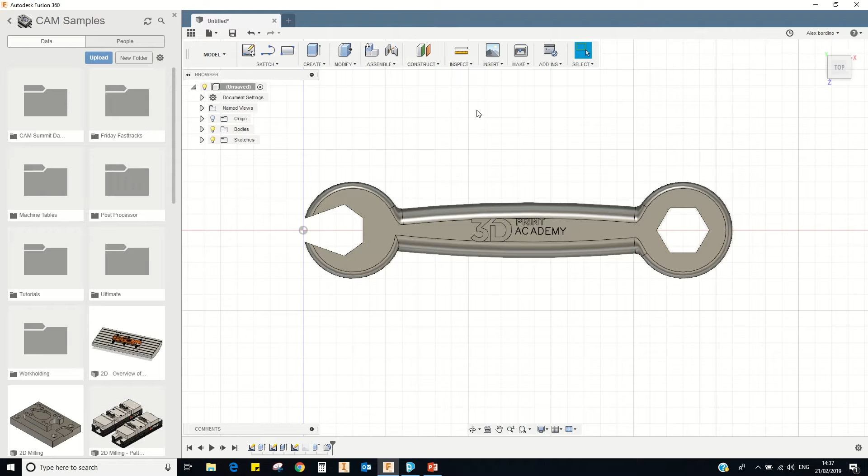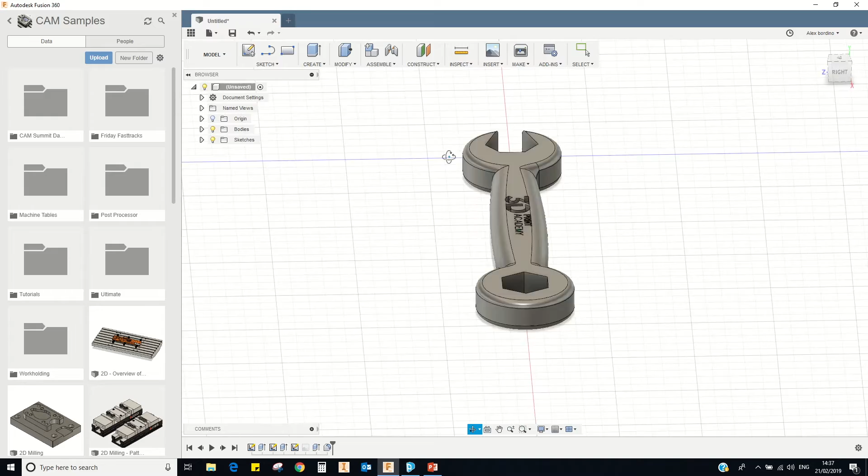This is Alex from 3D Print Academy, and in this tutorial I'm going to show you how you can use Fusion 360 to model this spanner, and then also how we can export it as an IGES or STL file so that it can be read by 3D printing preparation programs and actually 3D printed. But the first step is to actually model this in CAD, and we are going to use Fusion.

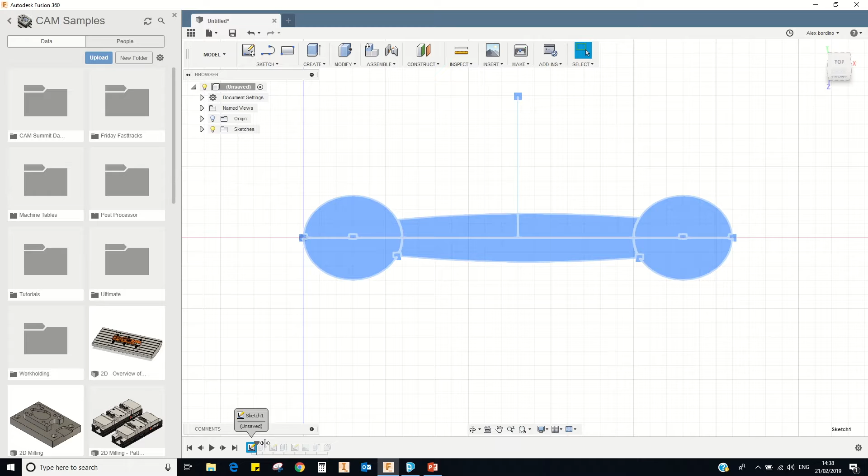I'm going to show you step by step how you can create this. So this is one I've made earlier, and the good thing with Fusion is I can go back in time and see all the steps that were used to actually build this. But before I do that, just some basic navigation if you haven't used Fusion before.

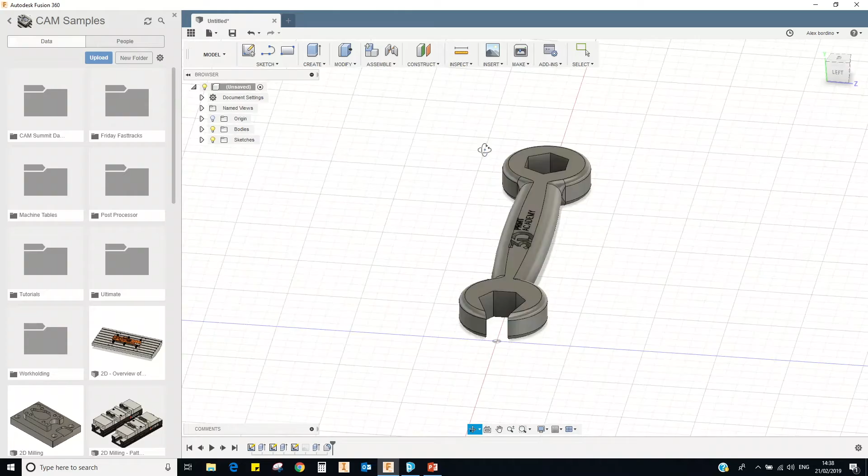To move around the model, if you zoom on the mouse wheel, you'll zoom in and out. You can hold the middle mouse wheel in to pan around. And if you hold shift and the middle mouse wheel and move your mouse, you will then be able to orbit round your model. So you can use all of these tools to navigate round and work on your model. There's no right or wrong way you have to be looking. You just want to be able to look at something properly so you can actually see what you're doing, really.

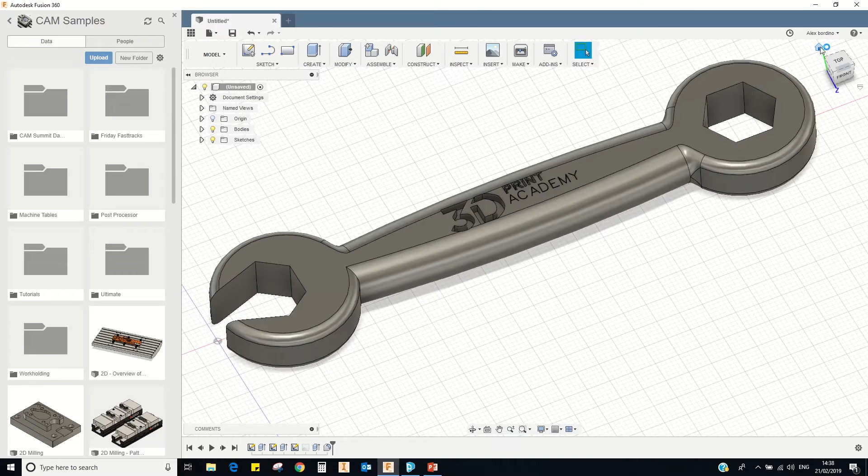As I'm moving around, you'll see that this little cube up here is moving about too. I can also use that by clicking on it to look at various areas of the model. I can click home just to return to the default view, and I can hit front, top, side, left, whatever. Really simple to use. So let's actually start building this from scratch.

So if I pull back on the timeline down here, you will see that I started off with this 2D sketch. So this is just mapping out the rough kind of design. And once that's kind of solid, we can then progress into the kind of 3D elements of it. So this 2D sketch is probably the most important part of the model. We need to make sure it's solid, that the CAD software knows exactly what sizes we're working with and how big things have got to be.

If it's unconstrained, that means if there's not enough information, basically, there's a risk that things could break later on. So we're going to make sure that that's not the case.

So when you first start Fusion, you've probably got a screen that looks a bit like this. First thing you're going to want to do is check that this says model. If it doesn't, click the drop down and click model, because we want to build a model.

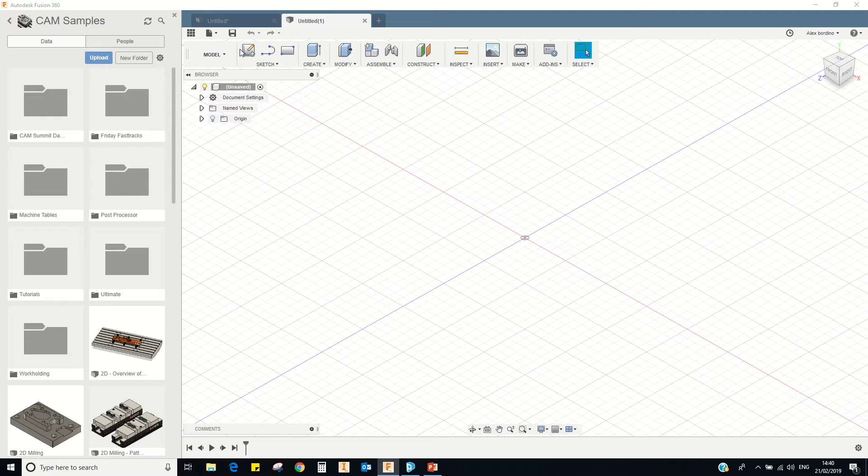And we want to create a sketch to start with. So we're going to hit create a sketch, and you're going to click on this little square here, this face or this plane, and we're going to navigate to there. So at the moment, this is the origin. That's the only point in time and space that the program knows where anything is. So we're going to draw off that, and basically we are going to replicate what's on this tab here.

So the first thing I'm going to put in is this overall dimension. There's 130 millimeters. This is going to be done with what's known as a construction line, just to roughly map out what it is we're building.

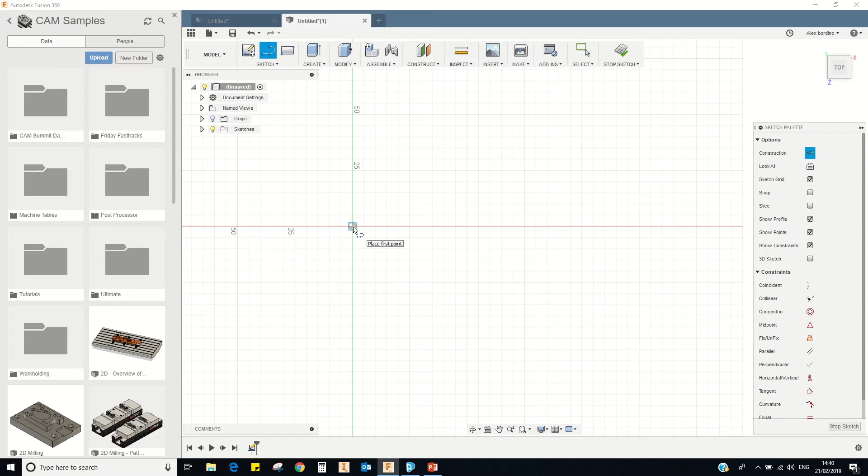So I've gone to the sketch area over here, clicked that drop down and clicked line. I'm then going over to this sketch palette window and selecting construction. So I can then click the origin here, and I'm starting to now draw a line, and you'll see that I can specify the distance and the angle. So I'm just going to snap it onto this red origin plane here.

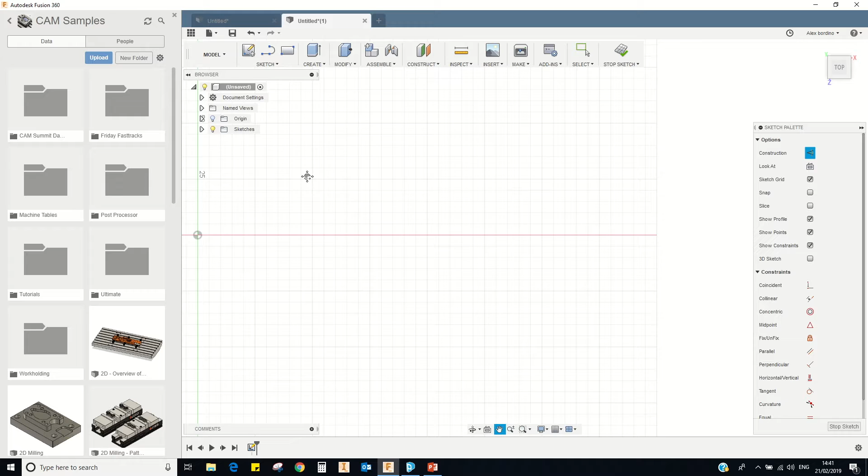I'm going to type the distance I want, 130 mil. Hit enter on the degrees because we want it at 0. And right click and press OK. Sorry, don't click OK, actually click on your mouse. My apologies. There we go.

So we've now got a construction line that's 130 millimeters, and that's going to be kind of the basis of our shape. So now we're going to do these circles.

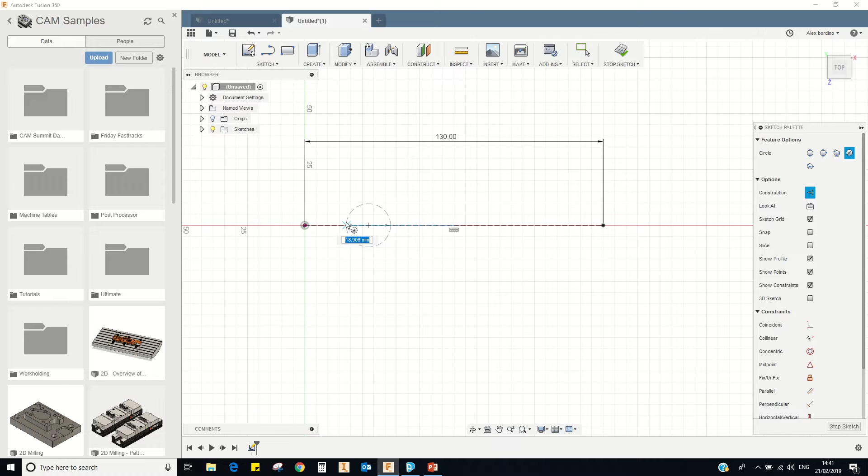So we're going to select the sketch button here, circle, and I'm going to go for a center diameter circle. Now my center of my circle is going to be on this line, so I'm just going to draw from any point on the line here and draw out until I meet the edge of this. So I've drawn that circle.

It's come out as a construction line. I don't want that. I want it to be a solid line so that we can actually extrude and create 3D geometry from this. So I'll pick that circle, deselect construction. Now what I've got to do is tell Fusion the exact size of this circle, because at the moment it's just any old size.

I've just told it I need this edge to be on this point here. But what I can now do is type D on my keyboard, and you'll see my cursor changes to a dimension tool. I can click the diameter of the circle, pull off a dimension, and type the value I want. So I'm going to type 30. That should now resize that circle so it's still centered on that line and hits the edge of this line here, so we're not going past 130, and it's 30 diameter.

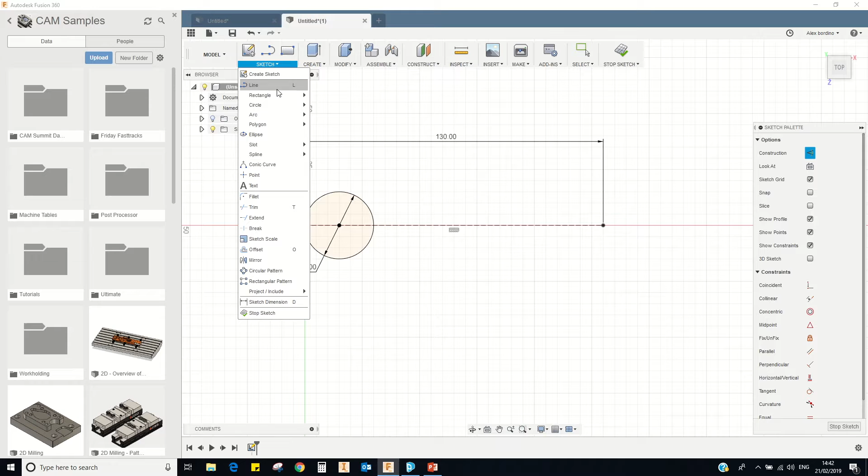So that's great, I'm happy with that. We're now going to do the same on the other side. So we'll go to circle, center diameter, just doing the same. And if I type D again, I can resize that to 30 mil. So that's the two circly bits of it done.

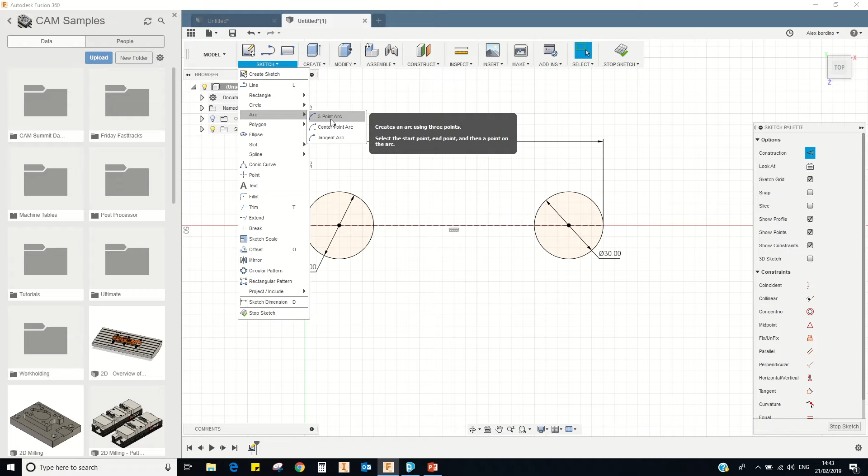We've now got this arced section here, which we'll now draw. So I'm going to go to sketch and arc. 3-point arc is what I want. Start of my arc will be somewhere here, end will be somewhere here, and I can then specify how I want my spanner to be. So we're going to do a bit of an arc up here, like that. And I'm going to convert that to a solid line again.

What I'm now going to do is tell Fusion exactly where to place this arc. As you can see, I can still drag it freely, which is not good. The circles I can't drag because they are fully constrained.

So we're going to type D and just dimension this arc up. First I'm going to click from this point to this point - that's going to be 73 something or other. Don't worry about the exact value, it just depends where you've placed your arc. That can be changed later.

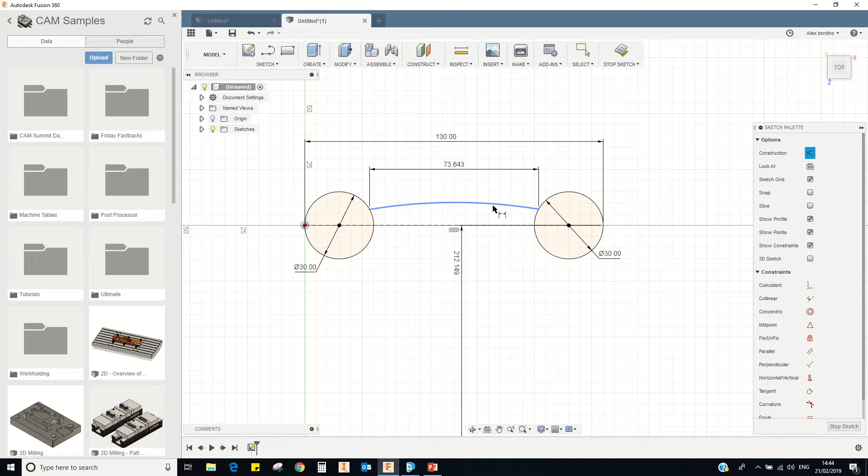We'll then put in the absolute radius of the arc. What else do we need? We will also need that radius as well. So we'll then pick this one here, and that should fully constrain your arc.

At this stage you can actually double click those dimensions and give them a more sensible number if you want to, although some of them it will probably prevent you from doing because they're restricted by other dimensions. So let's see if we can change that one. No, okay - the reason we can't change those is because these two points are absolute, and we've just told it to draw an arc between this point and this point, and it's fixed. So that's what it's going to be. Don't worry too much about the value of those numbers - it doesn't really matter for this application.

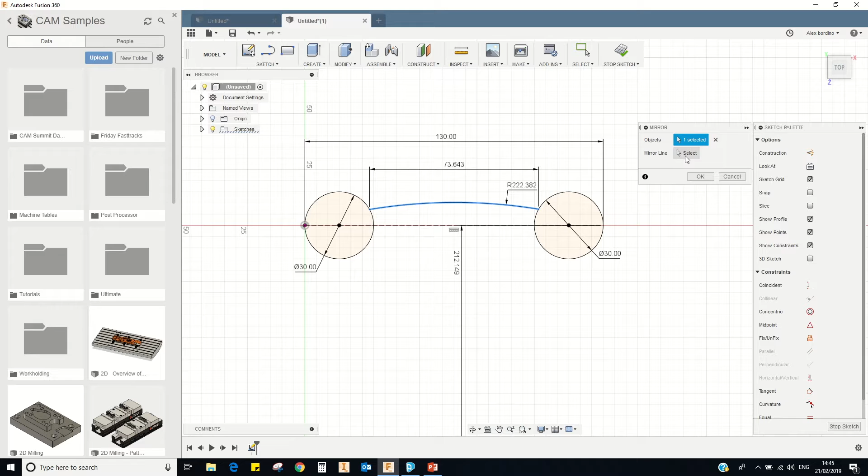So now that we've drawn one arc, we're not going to draw the other one - we're just going to copy it across. Providing you've got this construction line in the middle, we can use another command called mirror to actually mirror this line across. So we're going to go to sketch, mirror, pick this line, and then select the mirror line. We click that there, pick the mirror line, and press OK.

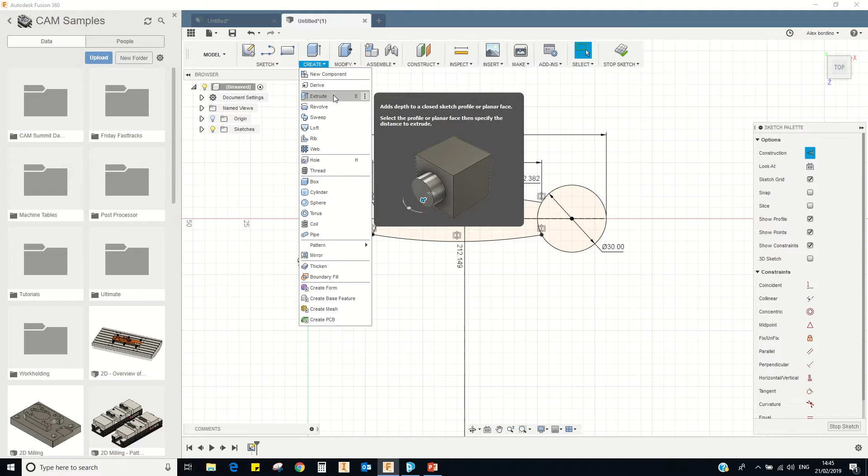So now we've started to actually build up, if I just orbit round, the overall shape of the spanner. If I just return to the top view, what we can now do is go on the Create tab and select Extrude - that will reorientate the view.

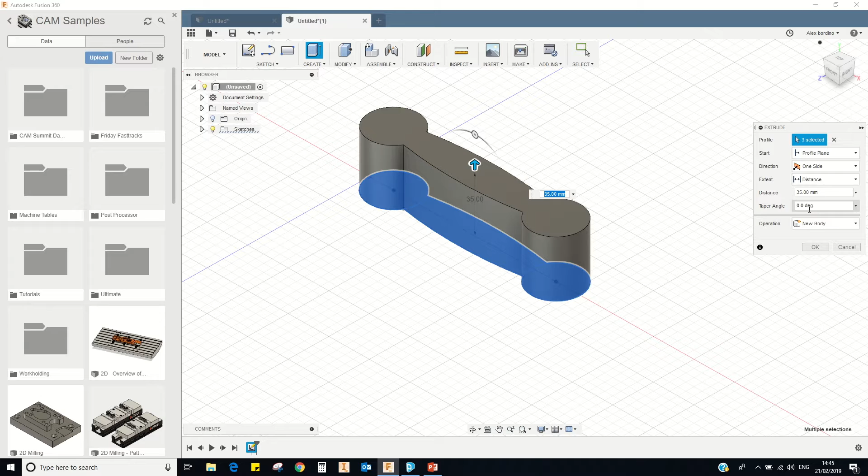What we can now do is pick these profiles to extrude them and actually make them 3D. So I'm going to pick the circle, this circle, and the midsection. I can drag this blue arrow up and extrude it to a certain value, or type that in here and change the direction. So I'm going to tell it that it's 10 mil in depth, so it's not too chunky - that's what we're going to go for, 10 mil. Hit OK - so we've now started to build up the shape.

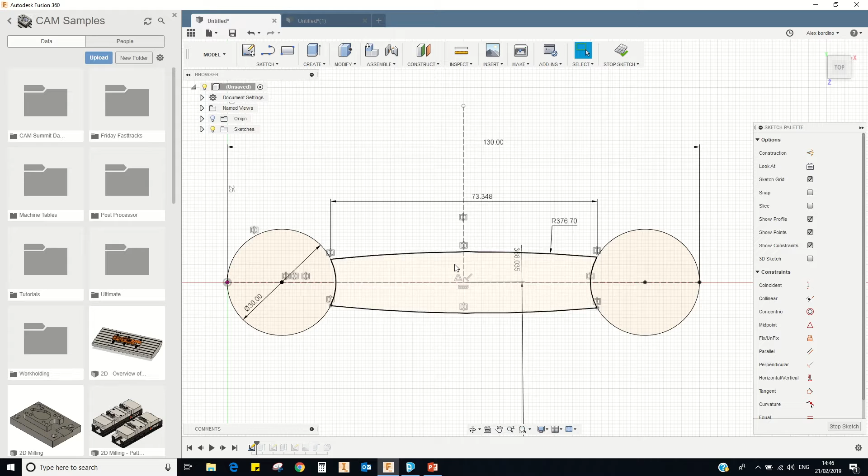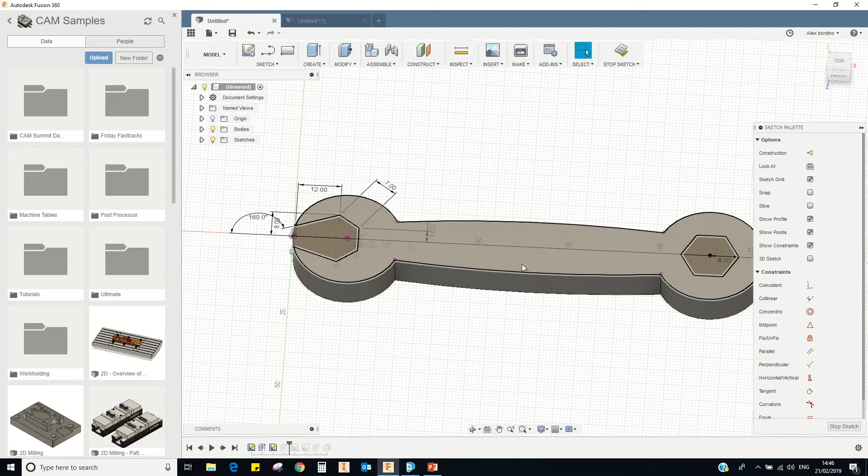So now what we've got to do is start to add some of the details onto this. If we go back to the original model, after the extrude we then created a secondary sketch with the details on, which were then cut out. So that's the next step - create these kind of features here, and it's quite easy to do. The first thing we're going to do is create another sketch on top of this 3D geometry we've just created, and we're going to create something similar to that.

So the first step is, if we go back to this model, we're going to click the top face we've just created, right click it, and a little menu appears. Click Create Sketch. That's going to create a sketch on this top face now.

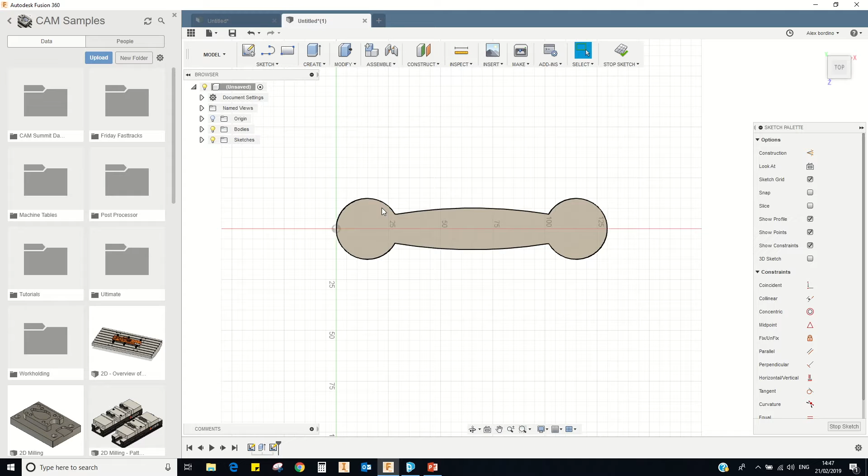So now we've got that, the next thing we need to do is something called Project Geometry. What that will do is automatically trace a sketch line of this shape for us. So we go to Sketch, then Project, hit that face there, and press OK.

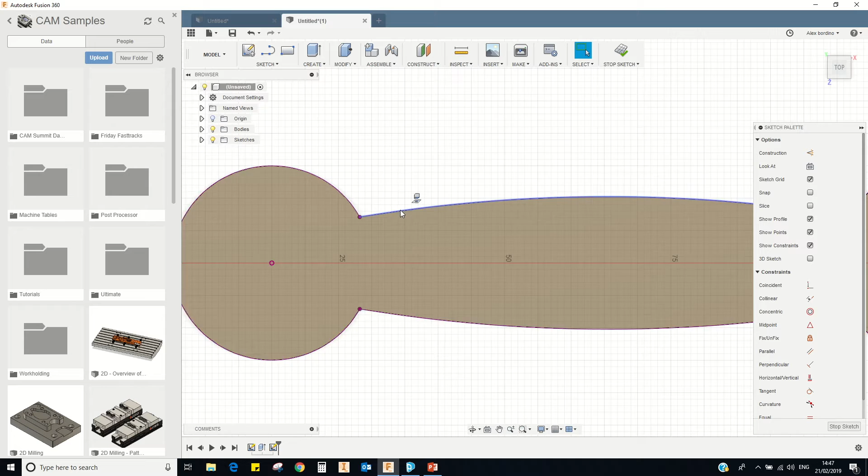What that will do is create some little purple points, and it will actually have created a purple kind of outline that's quite difficult to see around the shape. So we can now start building up the rest of the sketch.

Over on this side, I'm going to go to Sketch. We're going to hit Polygon, and we're going to hit Inscribed Polygon. What we're then going to do is hit this midpoint here, and we're going to draw out our polygon.

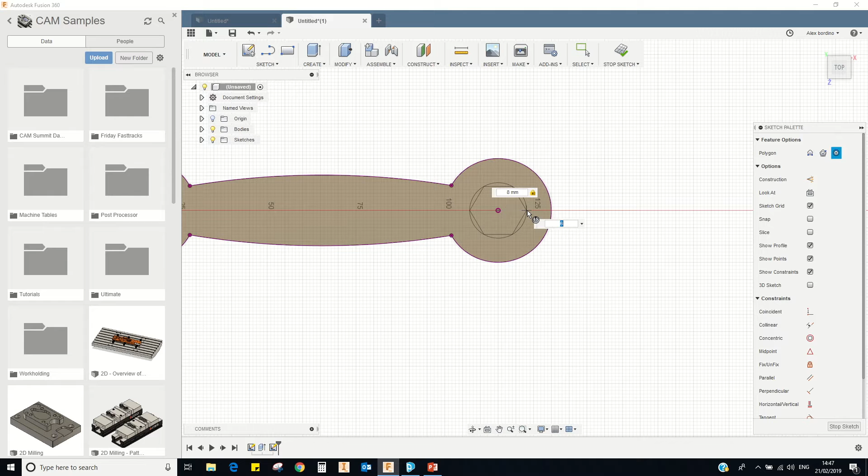I'm going to snap mine to the vertical here. You can give it a value of 8 millimeters, hit enter, and you can change the number of sides too. I'm going to go for 6, but you can type in an alternate number if you wish. Hit enter, and that's going to hit that there. I can then hit D and just constrain it to where it needs to be.

It's not that one. What it actually wants is probably a construction line. So I'm just going to draw another construction line from there to there. And if I just hit D, we'll tell it exactly where that is. So that's fully constrained by the looks of it. It's not moving anywhere, which is fine.

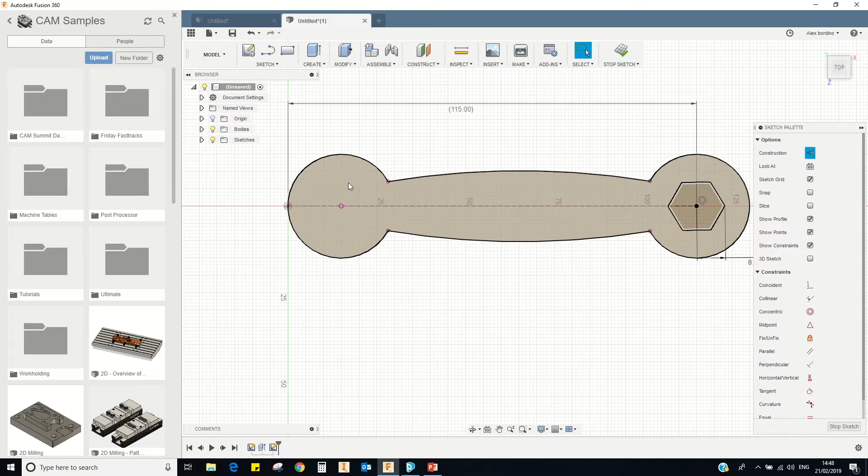So what we can now do is start drawing out the other part of the shape. Again, we're only going to draw half of it, and then we're going to mirror it. So I'm going to go to Sketch and Line, and start to draw out the shape. So line, there we go.

It doesn't matter too much on the value, you just want to get the rough kind of shape. Let me just go back. So it's going up, out, and flat down there. Okay, so let's go back. We'll go up vertically a little bit. We've got an angle, and then we'll come down. So we've got that roughly, and now we can play around with that and get it exactly how we want.

That'll do. Put some dimensions on there. So we'll have that there, make that 12, and we'll make that one 5. And we'll make the overall height of that 7, something like that. Yours may look a bit different to this, but it doesn't really matter, as long as you've got a rough kind of shape like that, that's key.

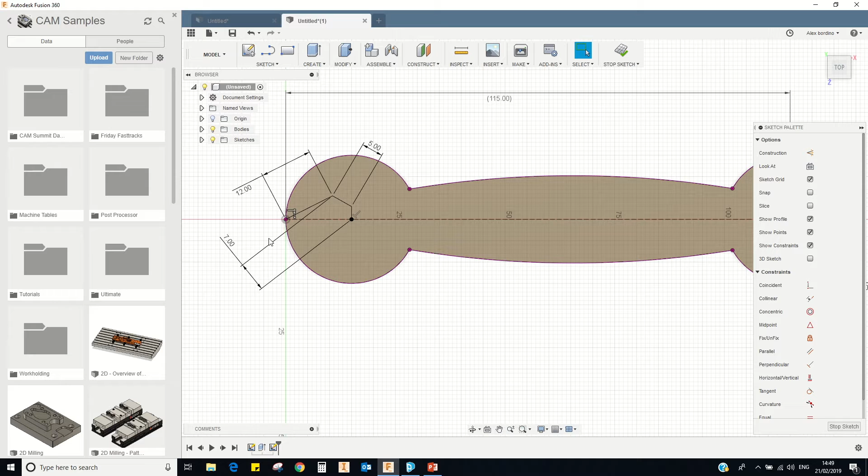I've just realised I've drawn mine a little bit wrong, because if I mirror it, it's not going to create a very good spanner shape. So I'm just going to redraw that line by pressing delete. I'm just going to redraw it to about here, so that we've got an actual gap. In fact, let's do that bit again. See, even the pros make mistakes. We'll go for 5 mil there, up, and we'll do it a bit more to there, to there.

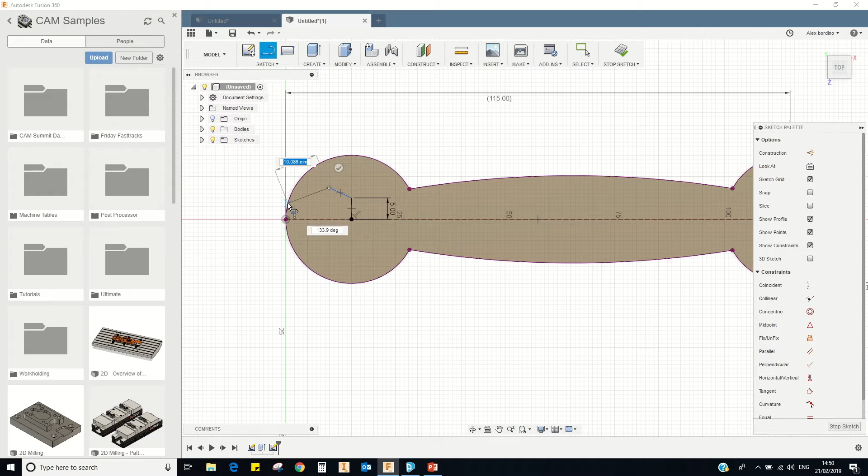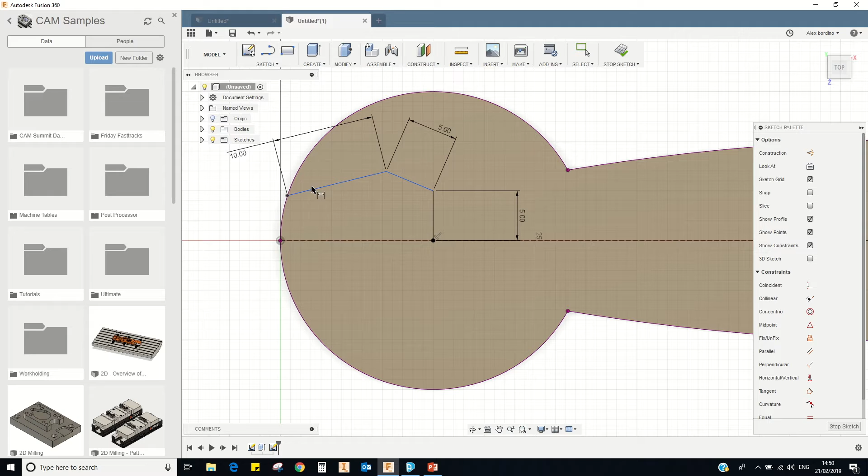So you don't want to end your sketch on this point here, otherwise it won't be a very usable spanner. So yeah, I've just redrawn it and changed the angle a bit. I'm going to add some other dimensions now by pressing D. We'll make that 12 — no, we won't, we'll make it 10 because that's what it was before. There we go, and we'll make that 5. That's fine, and then we'll just give that an overall distance there of 7. So that's great, now that's working.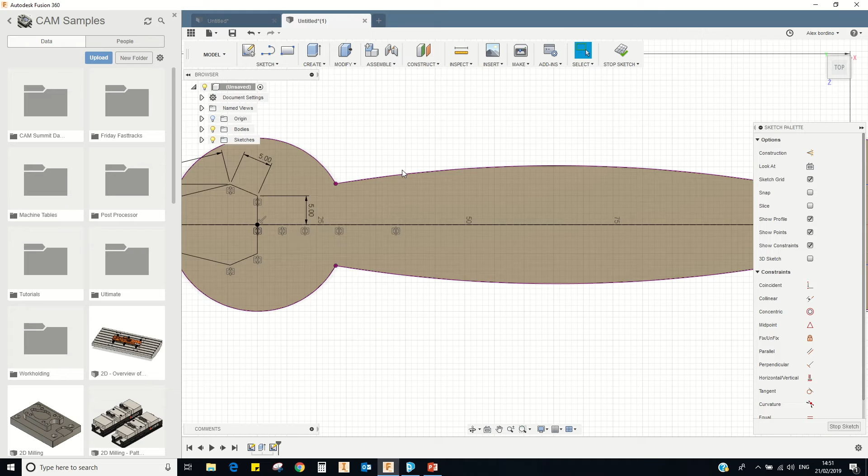What we can now do is mirror those lines across, so redrawing them. So we'll go Sketch and Mirror, and we'll pick those lines. That will be our mirror line. We'll press OK. So now we're starting to get a spanner-like shape.

What we can now do is hit Create and go Extrude again. This time we're going to pick those inner areas that we've just created. Drag your arrow down the other way and it should go red, and you'll see it's going to cut into the material now. So we can press OK, and that will cut that out. So we now actually do have a spanner.

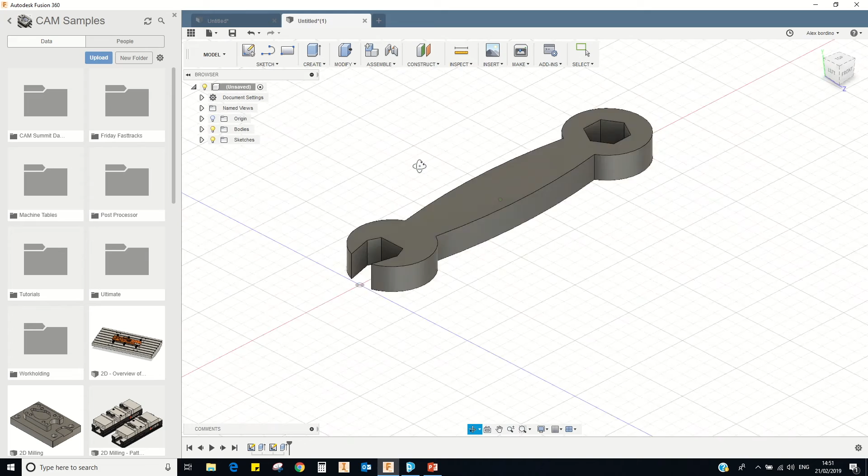It's nearly complete. The next bit is the trickiest bit, which is actually putting the text onto the model. So this is back to the original one now. If I just go back and forward in time, you can see that we've actually put the 3D Print Academy logo on. There are a number of ways you can do this, but the simplest is actually to bring it in as an image and draw around it.

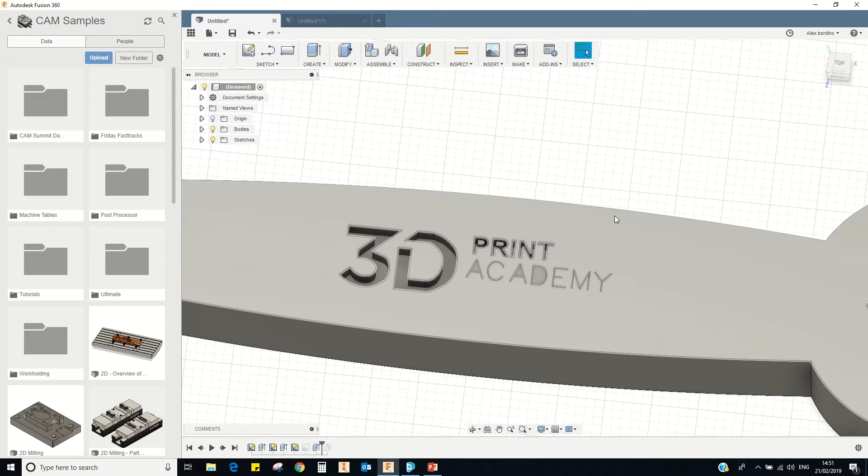So we're actually only going to draw around the 3D bit, so it's not difficult. The text elements of it, you could draw around, but it will take forever. So we're just going to use standard text tools and extrude downwards to create that.

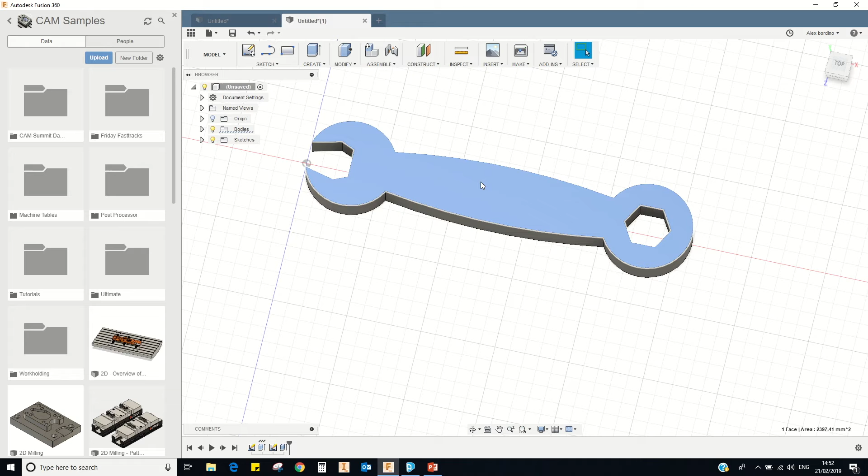So going back to our model here, again, we're going to click the top face, and we're going to right click it and go to Create Sketch. Now you'll need the image already saved onto your machine, which it should be.

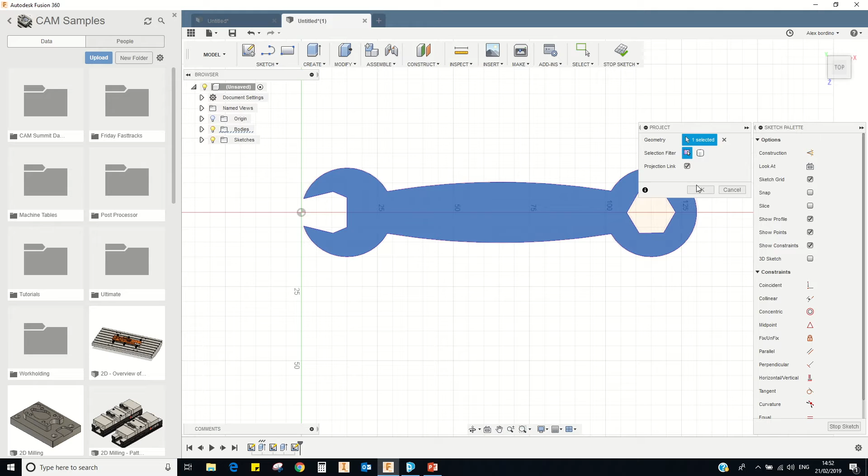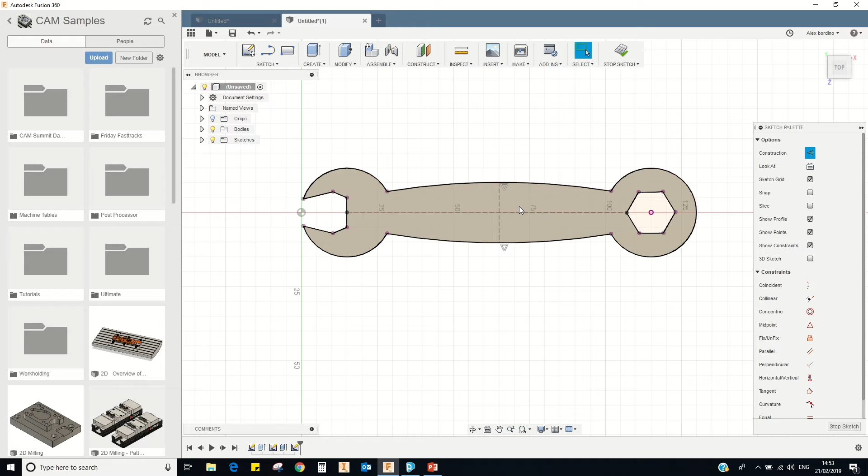Providing it is, you can then go to insert. But prior to doing that, what we'll do, we'll just project the geometry again. So we'll project that and we'll add a construction line just down the middle. And it might also be a good idea to add a secondary construction line from the middle down this way. You'll see as I move along the shape, a little triangle appears. That indicates that I'm at the middle or the midpoint. Now we've got a central location there to kind of line up our logo.

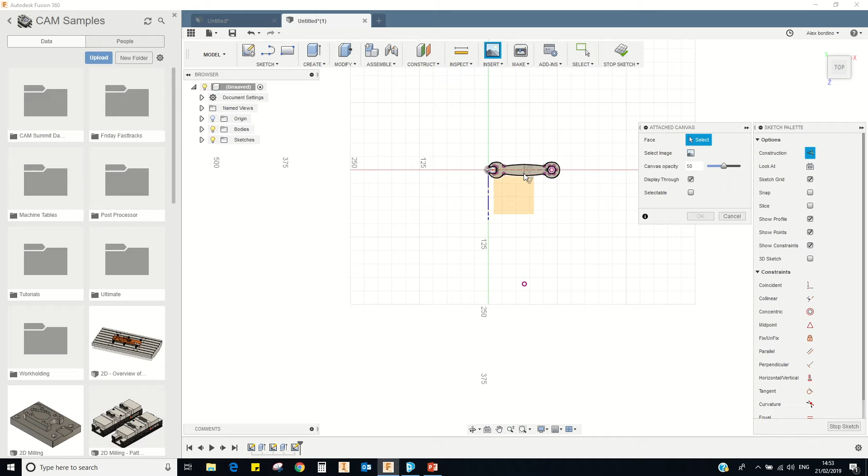So now we can go insert, and this little window will pop up. We can select the image. If you just navigate to wherever your image is saved, should be on your desktop, something like that. Click open, and that should, right, just click the face again, sorry. There you go. And now the image will be displayed.

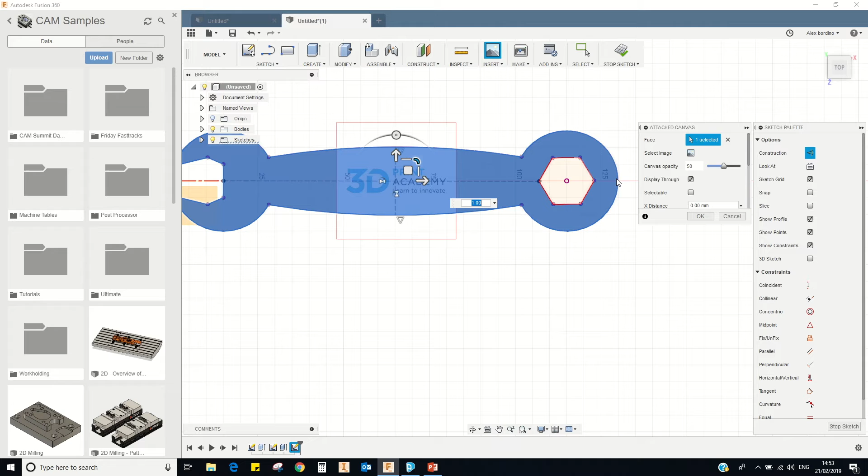So using this round area, we can rotate it round to where it needs to be. We can move it, and you can also increase the size of your logo. So don't make it too big. I left mine on 1, and it seems to fit nicely on the spanner, so we'll go with that. You can also change how opaque you want it. We actually want it quite visible because we're just going to be using it temporarily. So we'll whack that up to 100, press OK.

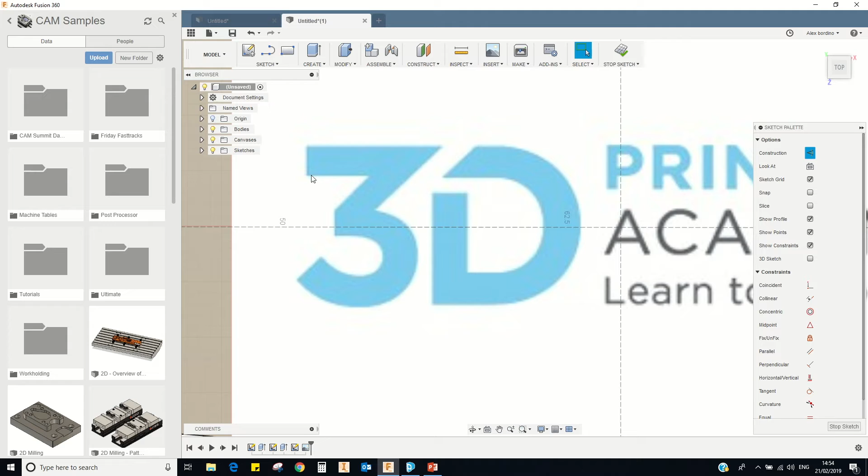So at the moment, that's just dumped the image onto that face. What we can now do is actually draw around it. So you're going to want to navigate to the top of the view cube and zoom in quite close, because the closer you are, the more accurate you are going to be able to trace round this shape. As I say, there are lots of other ways you can bring in images and create kind of decals or embossed features, but we're going to do it this way.

So for the straight lines, it's quite simple. I can just sketch along, make sure you've got solid lines selected. And don't worry about being too precise. As long as it's roughly there, it will look absolutely fine on the final model. So I'm just drawing around the text. So I'm not doing the curved bits yet. I'm just doing the straight bits with the straight line tool, like so. Try and do it letter by letter. Try not to do all of it in one go.

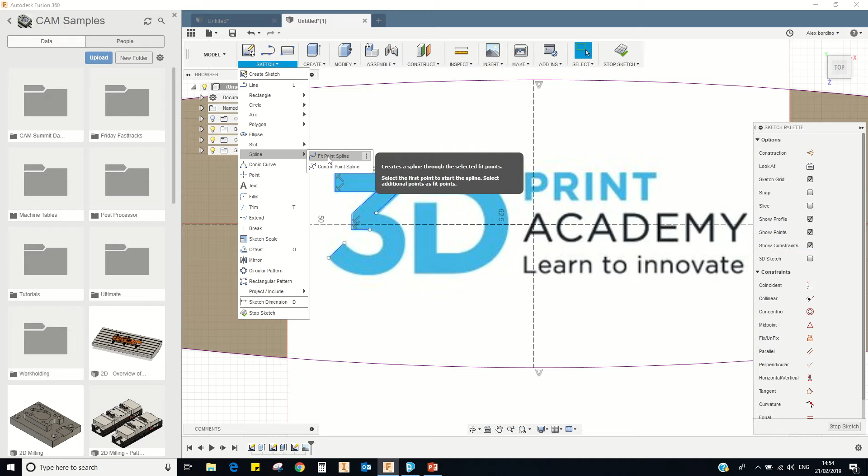For the curved bits, we're going to select a spline, which is here. And we're going to go to fit point spline. Basically, we're just going to keep clicking along the curve. And the more you click, the more accurate you'll be able to follow that curve. When we reach the end, just right click, press OK. And then we can go again. We can select spline and oops.

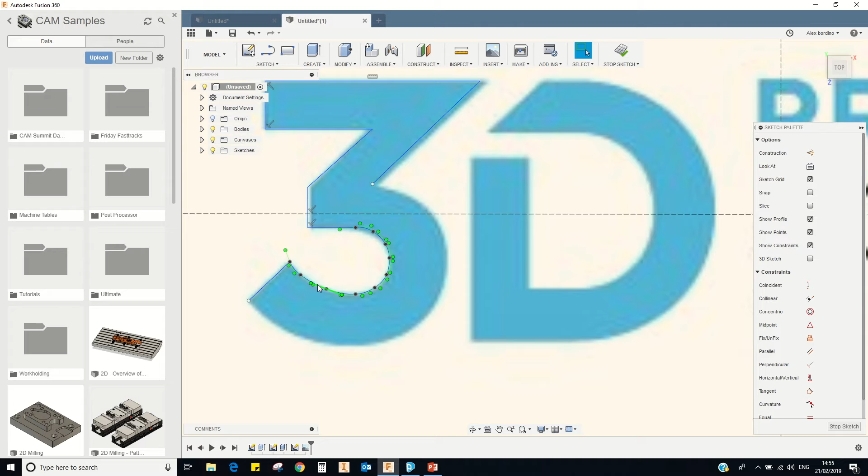Spline. Right. Why is that doing that? Spline. Have I got something selected I shouldn't have? I think I've come out the sketch now. There we go. So now I should be able to carry on drawing along.

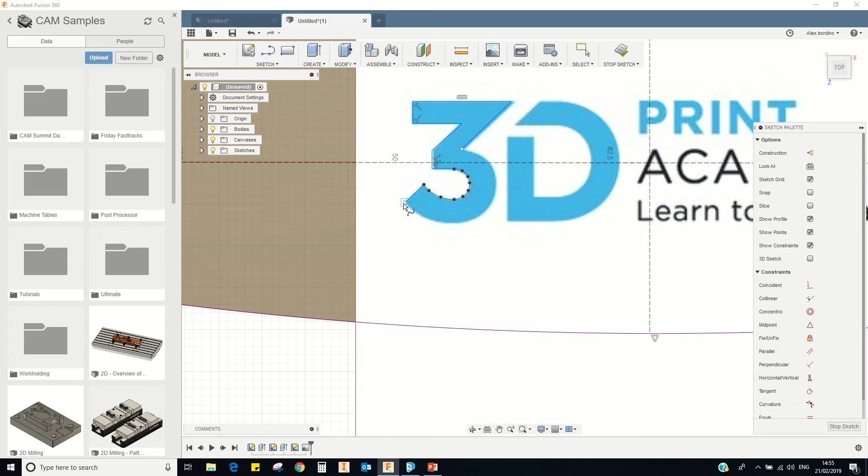Just roughly drawing around. It doesn't matter if you accidentally misclick, because the whole point of a spline is that you'll see once you create it, you get these control points which you can use to actually change the curvature of your shape. So once we've done one letter, we'll move on to this one.

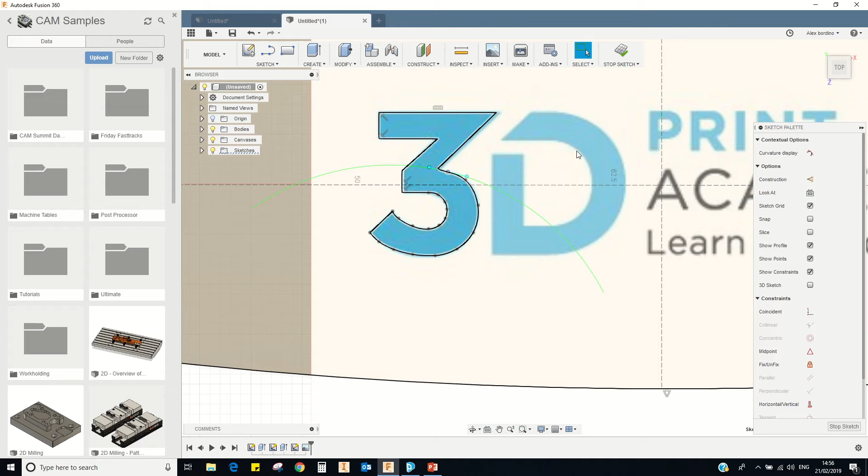Don't worry, we're not doing all of those. We're going to do those quicker. It's just this 3D bit we're going to do quickly. So then we'll do all the straight bits again. I should note as well, if you press L, you can get the line tool back quickly after you press escape. So for the curved bit again, we'll go to spline.

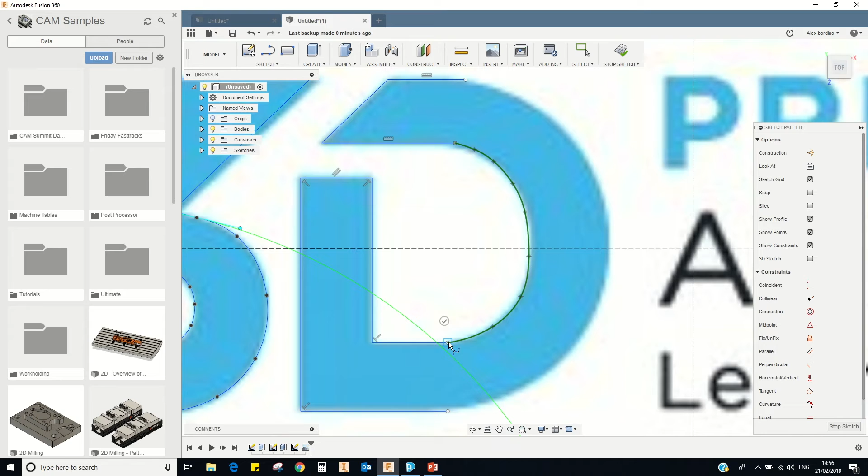I'll just zoom in a bit and roughly just trace around that curve. Okay, do another one. Oops, freezing a bit there. Right, spline, fit point, another.

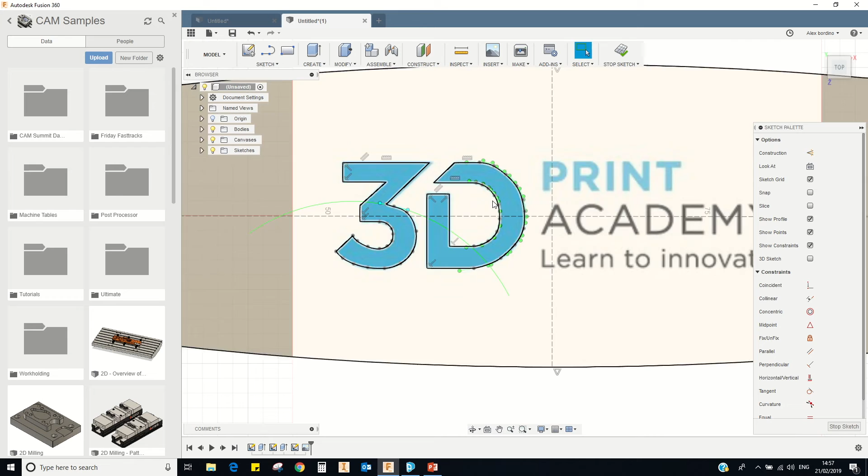Okay, so that's our 3D bit done. Again, you can modify and perfect it if you want to, just by pulling on those points. If you go wrong, just Control Z will undo.

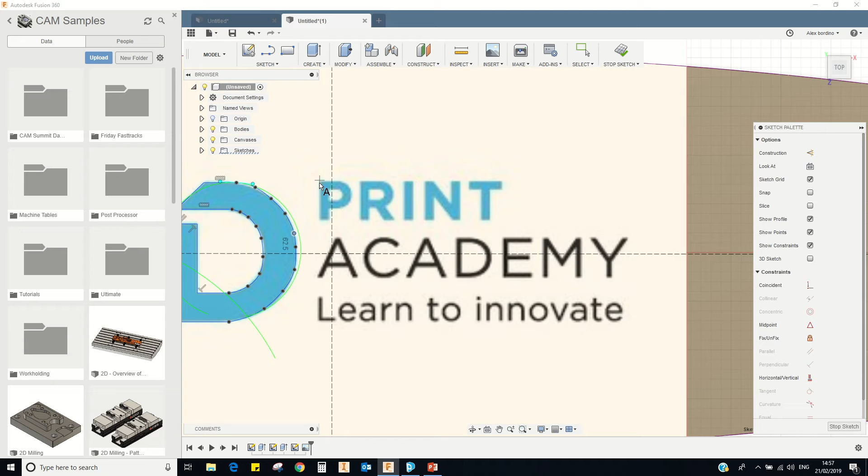So now we're going to do the text elements, and rather than draw this out, because this is just plain text, we're going to use a sketch text button. So we'll go to sketch and text, click somewhere on that P, and type PRINT in capitals. Hit bold, and that will start to generate the text. We can move it around, rotate it using the little thing that pops up, and we want it straight. If you type this, you can change the height.

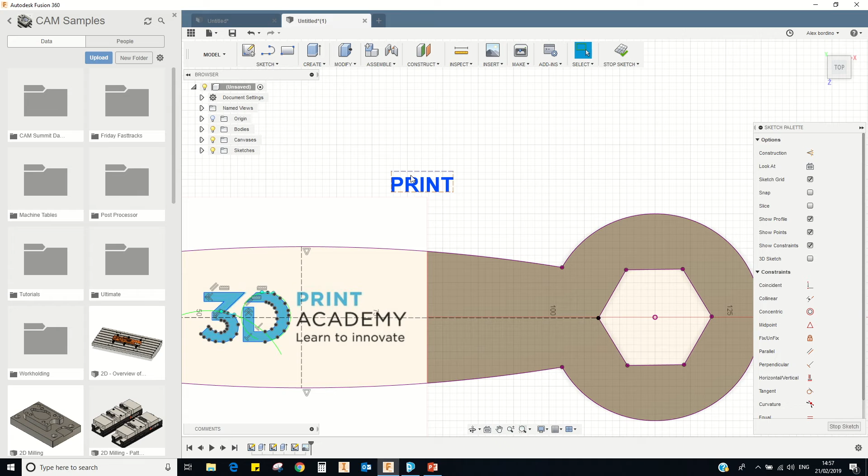So we might make that 5, maybe a bit smaller, 3. Yeah, that's going to do. So we'll click OK on that, and drag it to roughly over where PRINT is, so it's roughly matching.

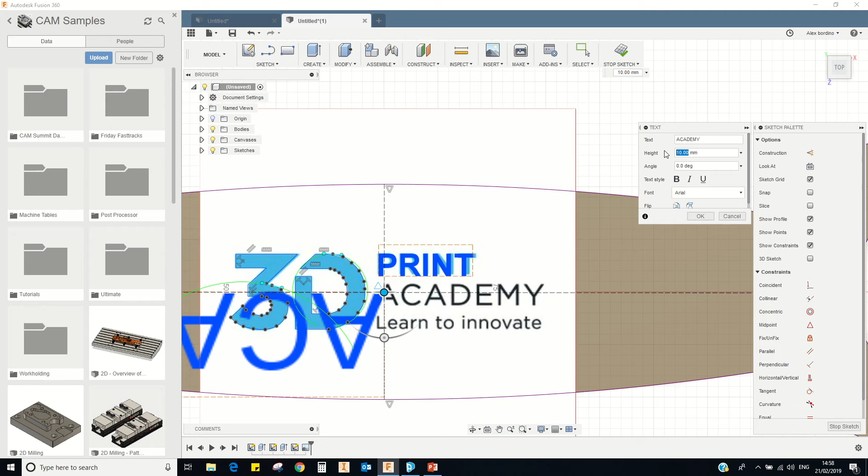Then we're going to do exactly the same for Academy. We'll take text, hit that point there, write Academy, change the height maybe to 2, and change the font to... not that one... AMGDT-IV25. As soon as you open that, you'll see it there. Just to thin it out, we'll reorientate it, and make it a little bit bigger. Let's make it 3, and let's make it bold.

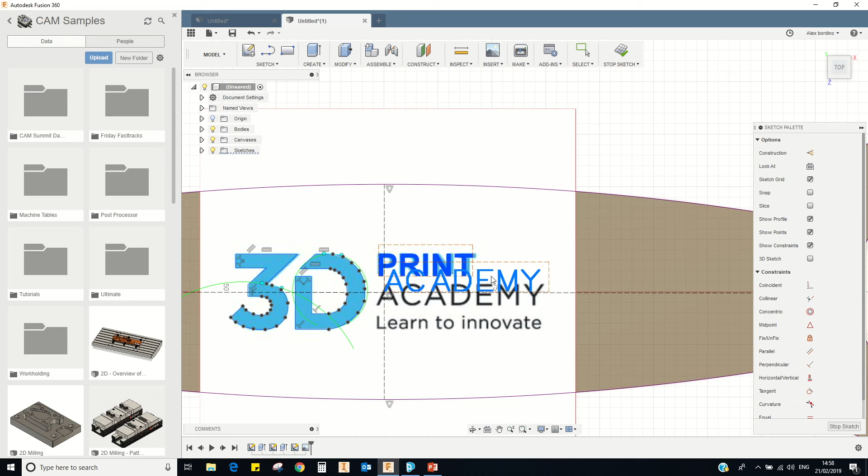Okay, so we'll just move that. Right, okay, I've accidentally hit the little construction point here, so my text wants to automatically fix to that point. If you want to move it off that point, you're actually going to have to delete it and redo it, so that's my bad. So don't just click the point, maybe just click somewhere in space, you won't have that problem.

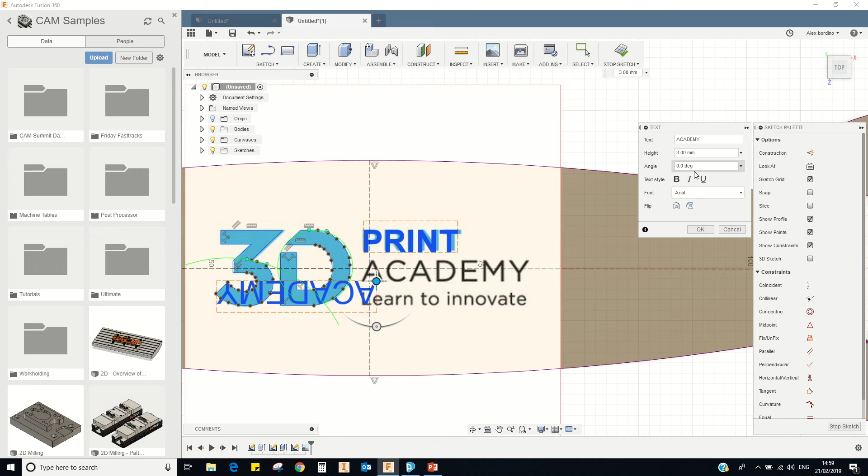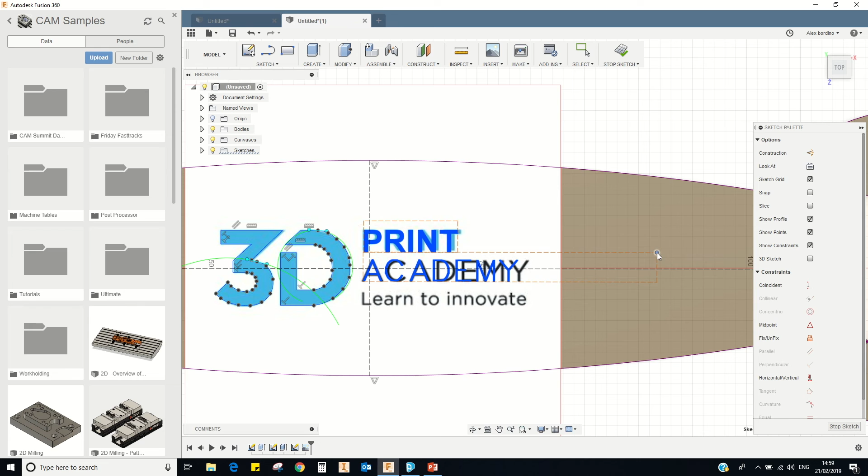So for Academy, we'll go for 3 mil, and we'll change the font to that one. We'll reorientate it, make it bold, hit OK, and then we can freely move it around, which is good. So we'll hit it there, size it up a bit. Again, because I don't have the exact font from Fusion loaded, it won't match exactly, but that's not a problem.

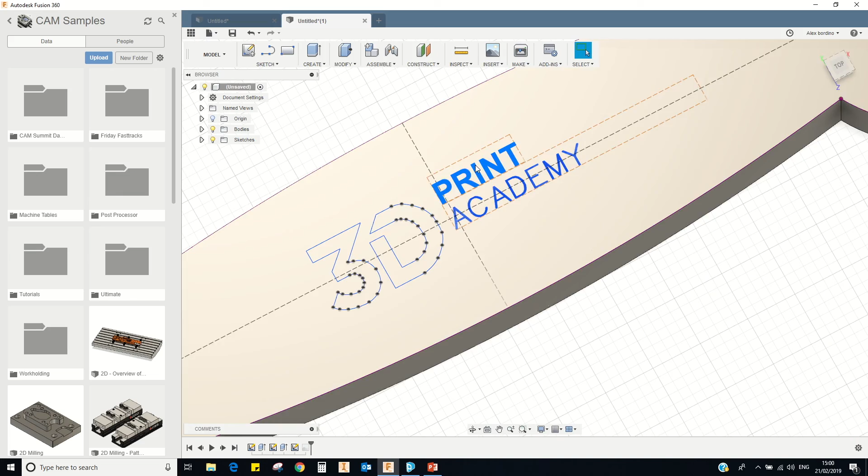So now what we can do is right click down here on that little picture - in fact we can stop the sketch first, right click on that image, and we can suppress feature, and that will just hide the image for us. So now what we've got is some areas that we can actually extrude and manipulate.

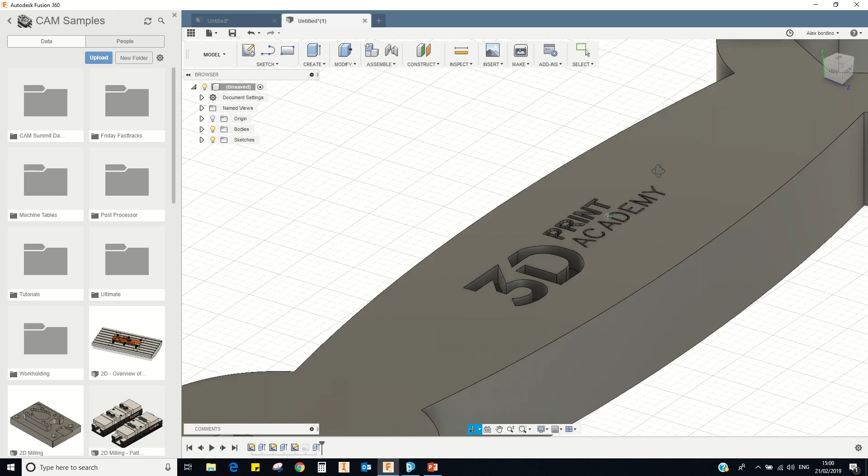So providing we're out of the sketch, we can now go to create, extrude, pick the 3D, pick both of your text, and just go down and type -2 mil and enter, and that will cut the text into your model. So the only thing we've got left to do now is round it off and make it a little more usable, a little more ergonomic.

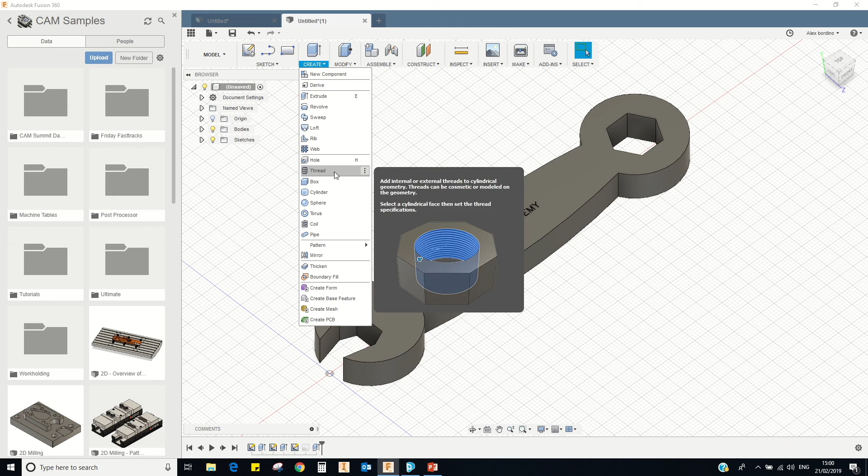If we go back to the original model, you'll see that's just been done by applying some fillets. So what we will now do is go back here, go to create, modify, and fillet. What we'll now do is pick the 4 edges here.

Okay, we'll give them a value that we want to have. I think 5 mil will work quite nicely. So 5 mil is going to create something like that.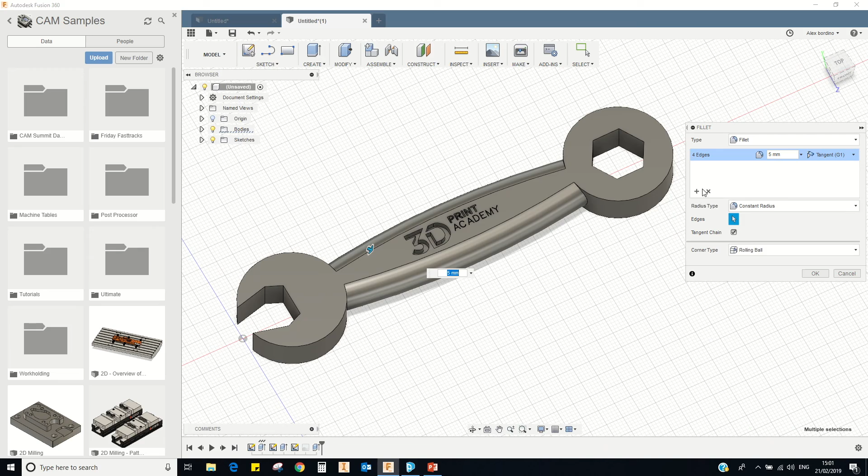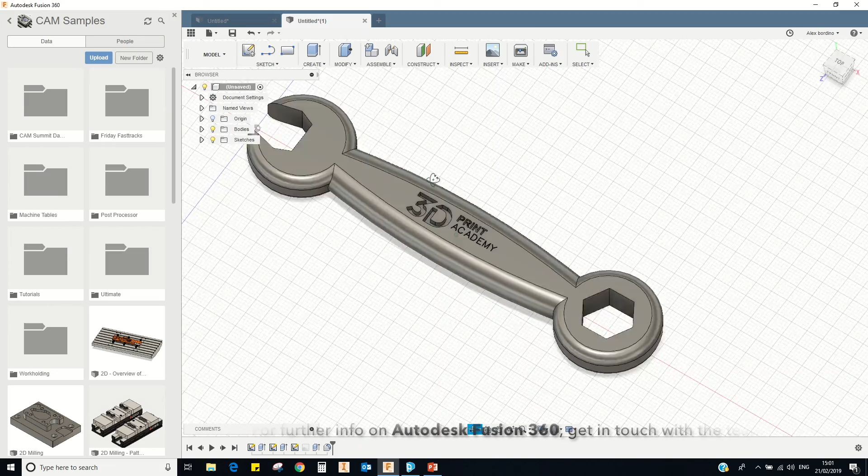So what we'll then do is click add new selection here, and we'll then pick this circle here, this circle here, that arc, that arc, that arc, and that arc, and we will type in 3 mil radius for those. And there we go. We'll now hit OK, and we have now built the spanner ready for 3D printing.

So what we now have to do is export this into a format that other 3D print programs can use. So we'll go to the little file button up here, and we will go to export. So for export, just call it 3D

PA spanner, and then just put your name there.

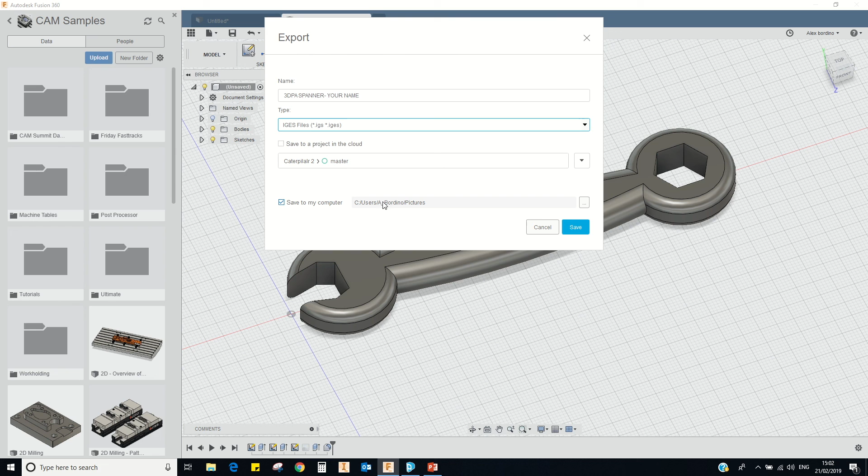The file type, you're going to want to put it as an IGES file, or a STEP file will probably work as well. Don't bother saving the project to the cloud unless you want to, but you can also save it to your computer, which is actually what we want. So I'm just going to save it to the desktop because it's a nice, easy location to have it.

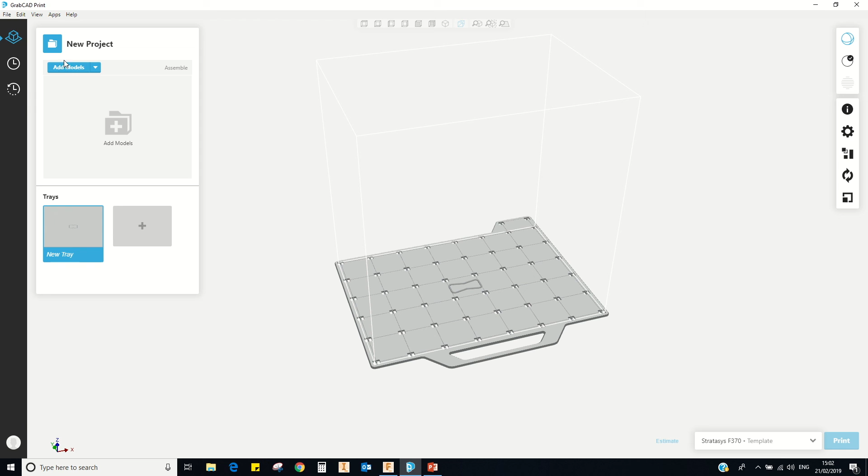So once we've done that, you are now ready to open up some 3D print preparation software and get this ready to 3D print. Just to show you it works, I've got GrabCAD open. If I go to add model, 3D PA spanner your name, that's the one we just made, I can hit open and it'll insert it into the software, and you're then free to orientate the model to where it needs to be, add support, slice the model, and prep it for 3D printing.